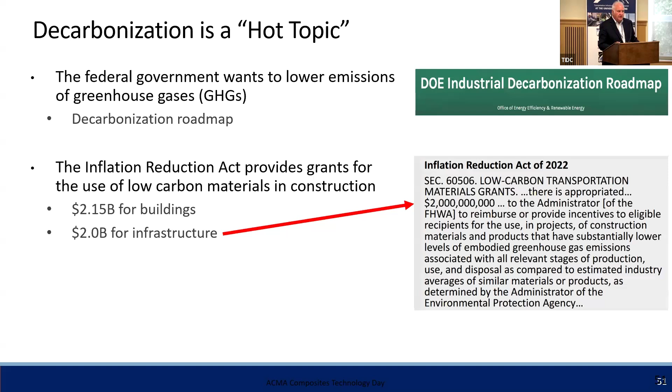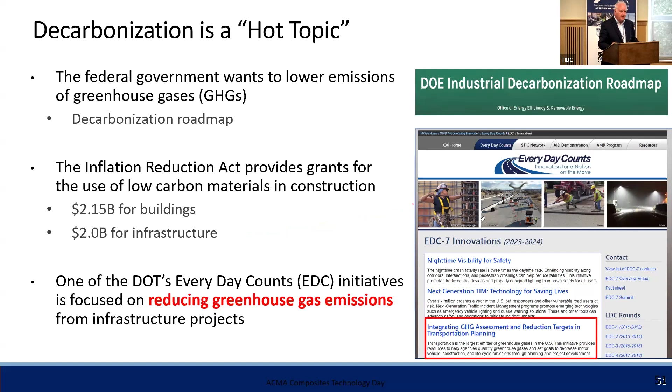And the government is definitely putting their money where their mouth is. They are committing billions of dollars to the use of low carbon transportation materials, including more than $2 billion for infrastructure applications. And then you have the Department of Transportation. One of their Every Day Counts, or EDC7 initiatives, is focused on reducing greenhouse gas emissions from infrastructure projects. And then you've got funding from the EPA. Last fall, the EPA announced a grant program focused on reducing embodied greenhouse gas emissions for construction materials and products.

I'm pleased to announce that ACMA and IACMI have collaborated on a proposal that was selected last month to receive a $6 million grant from the EPA to help composite fabricators generate more of those environmental product declarations, or EPDs, that Reed just talked about. They call the partnership CIRCLE, and CIRCLE stands for Climate Impact Reduction through Composites Life Cycle Evaluation. The purpose of the partnership is to show how emissions of CO2 and other greenhouse gas emissions can be lowered with composites. There are both cradle-to-gate and gate-to-grave elements of that program. And I can tell you that as a result of this program, you are going to see many more environmental product declarations for fabricated composite products in the next several years.

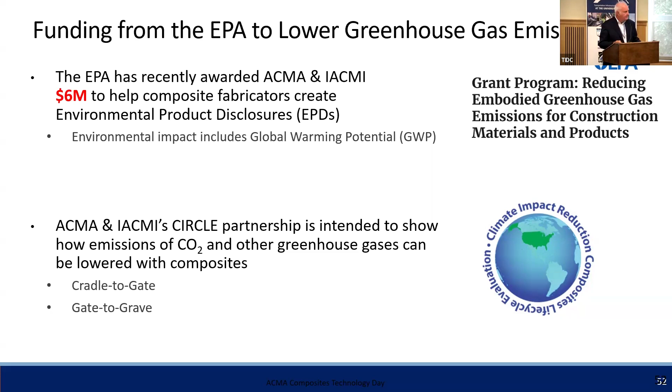So I told you the title of my talk is An Important Equation for Decarbonization. And I'm not going to keep you in suspense any longer. Here is the equation: Concrete plus FRP equals lower CO2, where FRP equals fiber reinforced polymer. Now, it's not a very mathematical equation. You've got a plus sign up there, you've got an equal sign up there, and you've got a subscript 2. But if you were looking for a differential equation, that's not what I'm showing you. I want to show you in the next 15 minutes or so how using this equation can be a solution to lowering CO2 emissions. It can help you decarbonize your infrastructure projects.

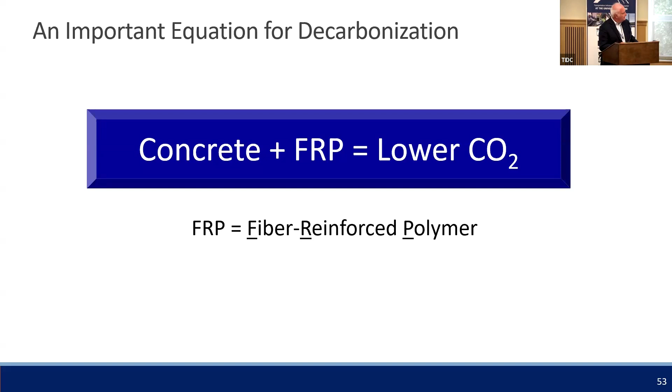So I've given you the equation. Now I want to give you the take-home message, and I'm going to repeat it several times during my talk. Here's the message: that the use of FRP composites can lower embodied carbon and CO2 emissions in infrastructure and construction applications. Simple equation, simple message.

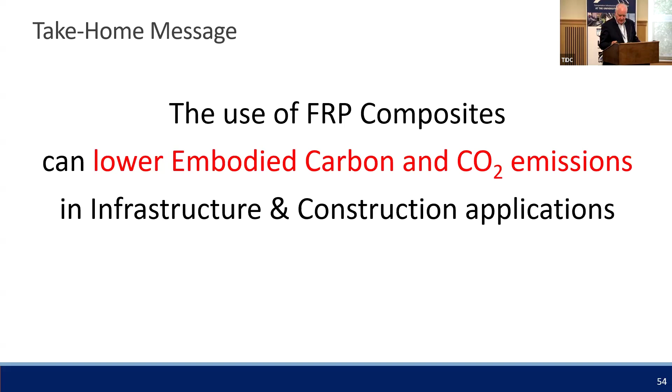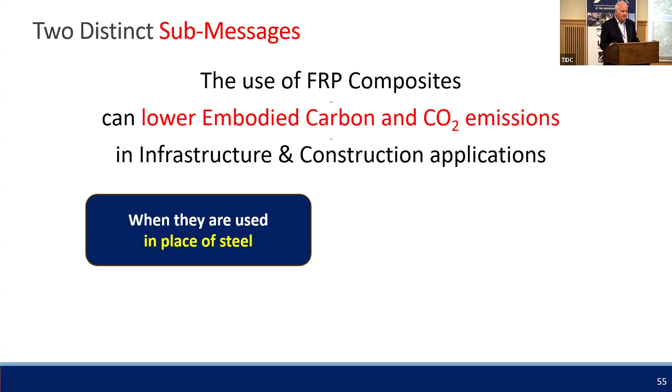And what I want to show you in the course of my talk is how this is true for both cradle-to-gate and cradle-to-grave emissions. Actually, I'm going to expand on this and say that it's really a two-part message, that there are two distinct sub-messages, if you will. The first is that the use of FRP composites can lower embodied carbon and CO2 emissions in infrastructure and construction applications when they are used in place of steel. And the second part of the message is that the use of FRP composites can lower embodied carbon and CO2 emissions in infrastructure and construction applications when they are used in conjunction with concrete.

And that's what I want to talk about today. So the first question you're probably asking is, why is it a two-part message?

Well, to answer that, I want to show you this slide and talk a little bit about sources of embodied carbon data. I'm going to tell you about multiple sources of that data. The first are these databases from the Carbon Leadership Forum. I call them the CLF databases. They were published in 2021 and 2023, and they give you emission factors for construction materials like concrete, steel, and aluminum. These databases do not contain information for FRP composites.

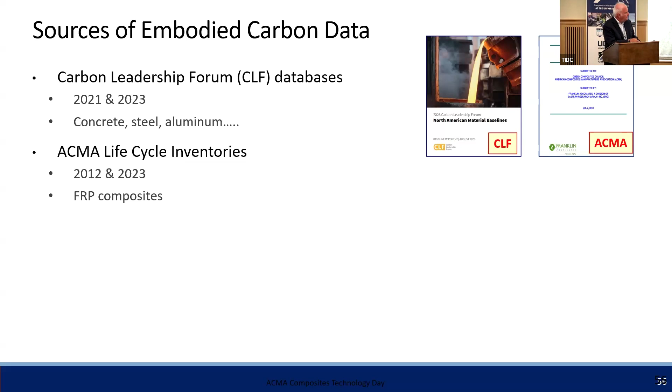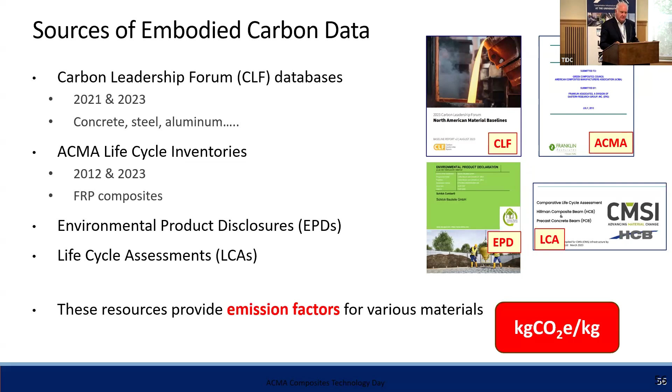When you get into these databases, the information you find is that they provide emission factors. The most common emission factor units are kilograms of CO2 equivalents per kilogram. That's the most common one, and that's the one I'll be using in a lot of these calculations. But it's not the only units, and you have to be very careful about them, because for concrete, for example, it can be kilograms of CO2 equivalents per cubic meter. So when you're doing comparisons between materials, it's important to watch the units.

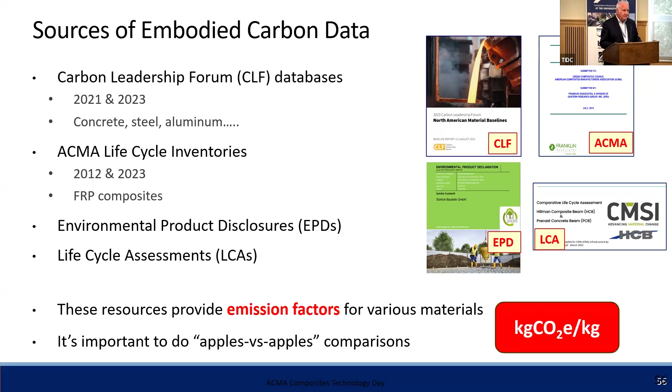And as Reed said, it's very important to do apples-to-apples comparisons, and that's what I've tried to do. So now I can begin to say, why is it a two-part message? To do that, I'm going to show you some example calculations.

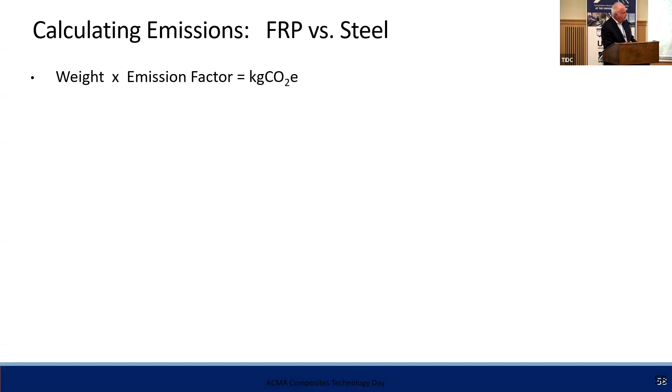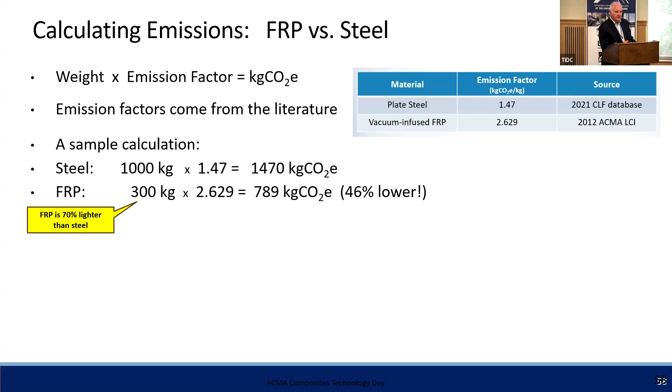The first one I'm going to do is FRP versus steel. To calculate kilograms of CO2 equivalents, you need a weight and an emission factor. The emission factors come from those databases in the literature I've just shown you. I'm showing here the ones I'm using for plate steel and FRP in this example. Now, to keep the math simple, I'm going to take a steel part and make it 1,000 kilograms. So to get kilograms of CO2 equivalents, I multiply it by this emission factor, and I get 1,470 kilograms of CO2 equivalents.

Now let's do the same thing for FRP. This is where the weight difference between steel and FRP becomes extremely important, because instead of a 1,000 kilogram part, FRP is 70% lighter than steel, so you only have a 300 kilogram part. Now you multiply it by this emission factor for vacuum infused FRP, and you get 789 kilograms of CO2 equivalents. That is 46% less than the example with steel. So the emission factor for FRP is higher, but the weight of FRP is much lower, and when you calculate that product, you get lower kilograms of CO2 equivalents with FRP. So this is sub-message number one: you can use FRP in place of steel to significantly lower emissions.

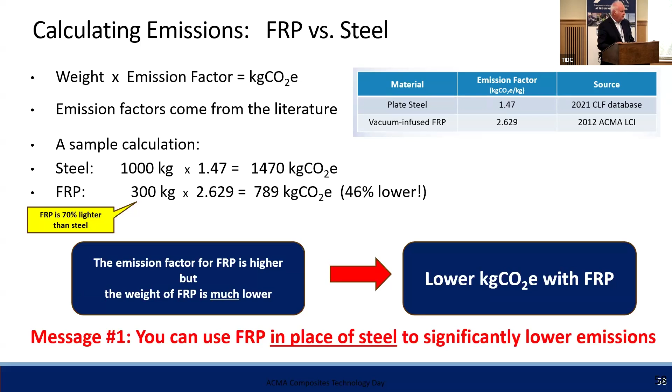Now let's talk about sub-message number two. Here I'm comparing FRP versus concrete. Again, I go to the literature and get emission factors for the various materials. Now I'm sure that almost everyone in the room has heard somewhere that cement production is one of the largest producers of CO2. I've seen numbers as high as 4 to 8% of global CO2 production associated with the production of cement. So it's true, but a lot of that has to do with the sheer volumes of cement produced every year.

And remember, you don't build structures with cement, you build structures with concrete. Concrete is only about 10% cement. So the emission factor for cement is 1, but the emission factor for concrete is 0.1, and that order of magnitude makes a huge difference when you're doing calculations. Let's do one: again, I'm going to take a 1,000 kilogram part with concrete, but I only multiply it by 0.1, and I get 100 kilograms of CO2 equivalents.

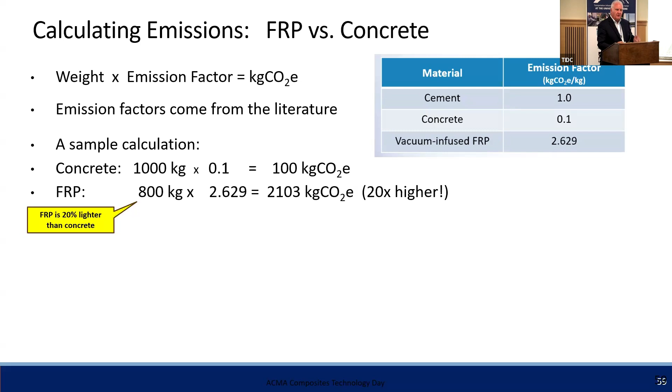Now let's do it for FRP. FRP is lighter than concrete, about 20% lighter, so I've only got 800 kilograms there. But then I have to multiply it by 2.629 and I get 2,100 kilograms of CO2 equivalents. That's 20 times higher than concrete.

So replacing concrete with FRP does not reduce emissions. You need a different message, a very different message than with steel. And message number 2 is that you can use FRP in conjunction with concrete to lower emissions.

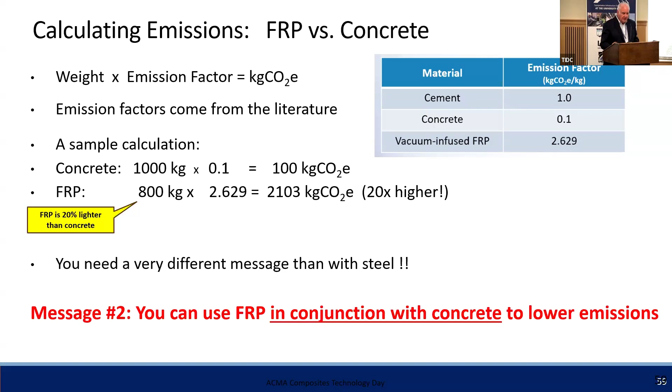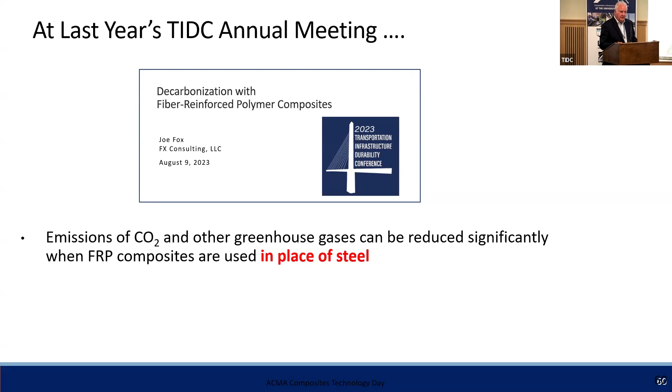So at last year's meeting, a year ago, I gave this presentation, Decarbonization with Fiber Reinforced Polymer Composites. And I really told you message number 1. I showed you that emissions of CO2 could be reduced significantly when FRP composites are used in place of steel. So I'll call last summer's presentation Chapter 1, all right?

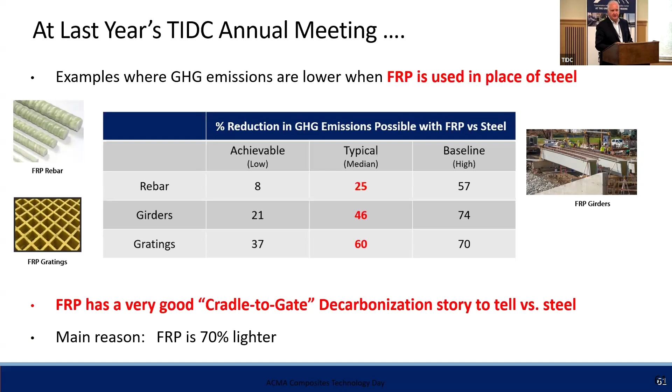So if you summarize all this, and this was the take-home message last year, FRP has a very good cradle-to-gate decarbonization story to tell versus steel. And the main reason is that FRP is 70% lighter than steel.

Now let's move to Chapter 2, a different message. Emissions of CO2 and other greenhouse gases can be reduced when FRP composites are used in conjunction with concrete. And here I come to this very simple equation: concrete plus FRP equals lower CO2.

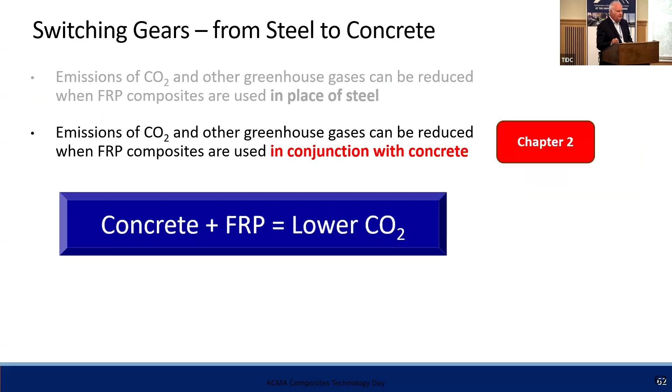And what I want to show you are 4 examples where you can lower CO2 emissions by using concrete with FRP composites. I'm going to talk about the Hillman composite beam, carbon pre-stressed concrete, the Halls River Bridge, and carbon cast. And in all 4 examples, again, I'm going to show you double-digit reductions in CO2 emissions when you use FRP in conjunction with concrete.

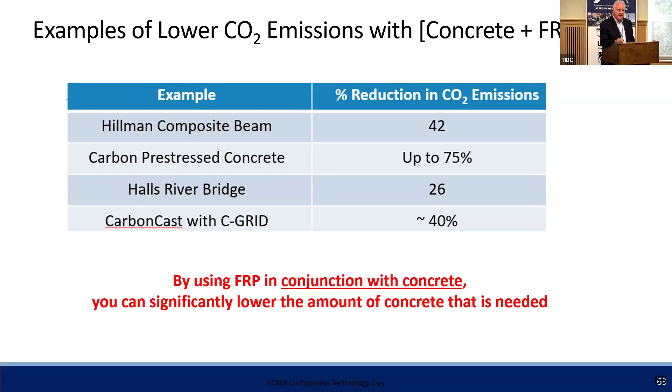And the reason is that by using FRP with concrete, you can significantly reduce the amount of concrete that you need. And when you need less concrete, you need less cement, and you generate less CO2. So let's go through those.

But before I go through those 4 examples, I just want to show you this very useful figure from the 2023 CLF database. I really like this figure because it shows all the life cycle stages of a building material. You've got the product stage, the construction stage, the use stage, the end of life. Down here, you've got these arrows which very clearly define things like cradle to gate and cradle to grave. It also contains alphanumeric terms like A1 and B3, which define the various steps in each stage. I'm going to be using some of these alphanumeric terms as I go through the 4 examples.

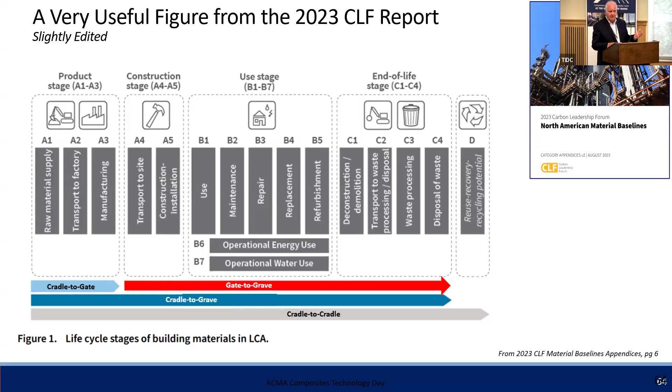So first, let's talk about the Hillman composite beam, or HCB. How many of you have ever heard of the Hillman composite beam? Okay, quite a few people, all right? Well, there's a picture of a beam. There's a schematic showing the various elements of a beam. And the best way to describe an HCB is that it is a hybrid construction that contains embedded steel rebar in a concrete core and a thin outer FRP shell. So what you've got here is a beam that contains concrete, steel, and FRP.

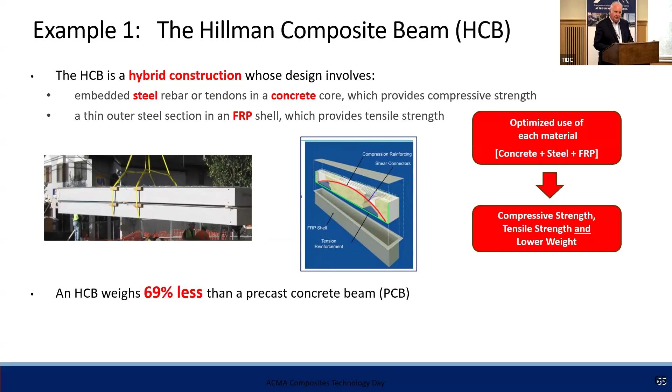And it's the optimized use of each of these materials that gives you both tensile strength and compressive strength. It also results in a much lower weight beam, because an HCB weighs 69% less than a precast concrete beam of similar size.

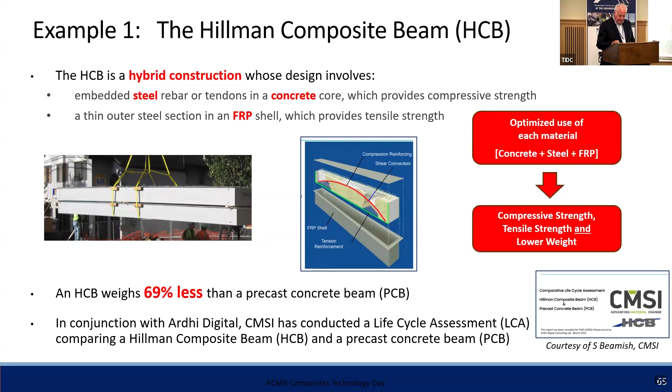In conjunction with Ardhi Digital in the UK, CMSI, a Canadian fabricator, has conducted a life cycle assessment comparing a Hillman composite beam and a precast concrete beam, PCB. Here are the results of that LCA. This bar chart shows a 42% reduction in global warming potential, in the amount of greenhouse gases, when you use the Hillman composite beam relative to the precast concrete beam. You've got 15,000 kilograms of CO2 equivalents for the HCB, and over 26,000 for the PCB.

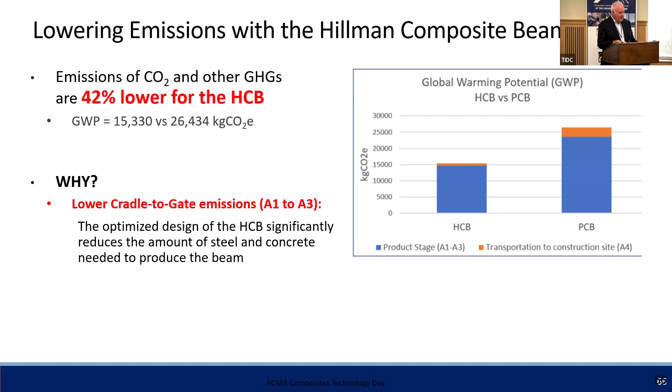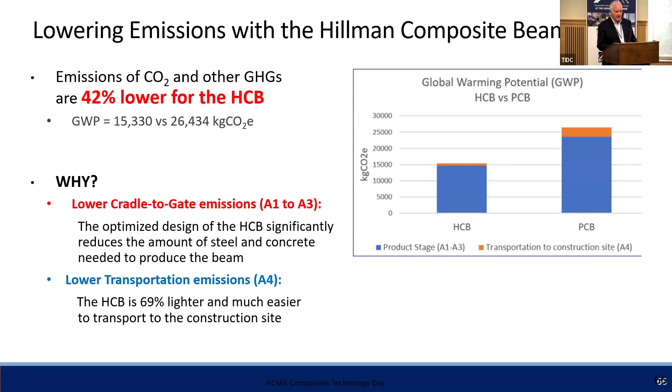42% lower. Why is that? Two reasons. First, the cradle to gate emissions, those A1 to A3 emissions, are lower because the optimized design of the beam significantly reduces the amount of steel and concrete you need to produce the beam. Second, you've got lower transportation emissions, or A4 emissions, because the HCB is 69% lighter, which means it's much easier to transport to the construction site. 42% lower.

The second example I want to talk about is carbon pre-stressed concrete, or CPC. This is a technology developed by a Swiss company called CPC AG, who worked with Holcim, a big concrete supplier, to bring it to the marketplace. They've won a lot of awards in Europe for this. CPC uses high-strength concrete reinforced with pre-stressed carbon fibers, and it's used in applications like this pedestrian bridge and this observation tower.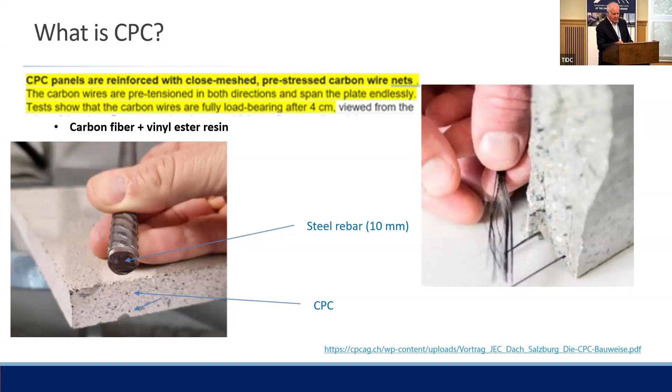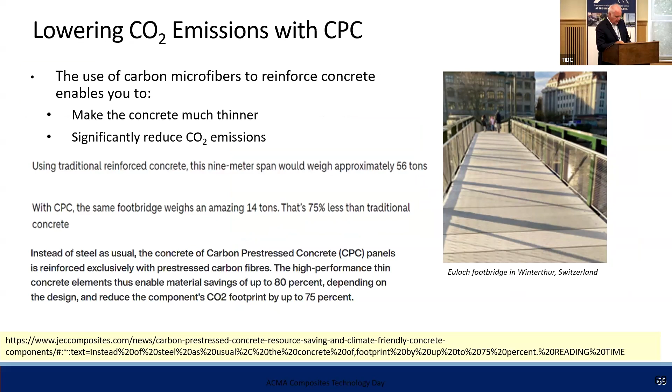So how do you lower emissions with CPC? The use of those carbon microfibers to reinforce concrete enables you to make the concrete much thinner, and that significantly reduces CO2 emissions. Less concrete, less cement, less CO2. They use the example of a footbridge in Switzerland to make that point. If you make this footbridge with traditional reinforced concrete, it would weigh 56 tons. When you make it with CPC, that same footbridge weighs 14 tons, a 75% reduction in weight. You're reducing the component CO2 footprint by up to 75%.

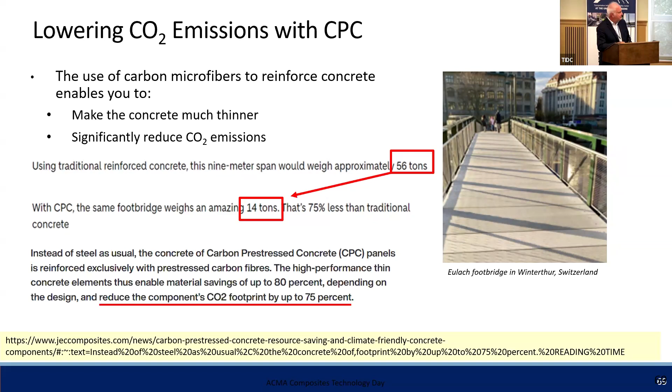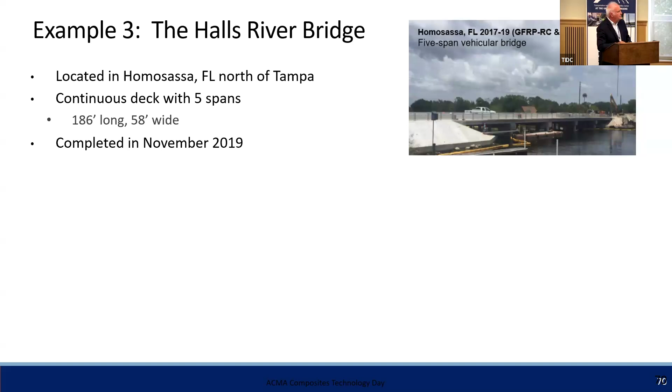75%, double digits. The third example I want to talk about is the Halls River Bridge. This is located in Homosassa, Florida, north of Tampa. It's a continuous deck with 5 spans, completed in November of 2019. You see a picture of the bridge there. This was really an experimental project by the Florida DOT, who used all kinds of innovative materials in this bridge.

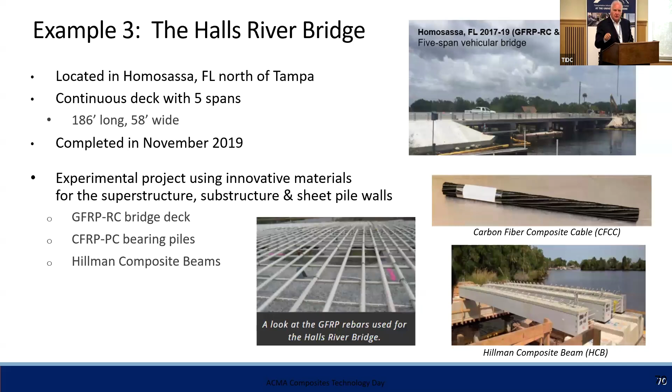Many of them were FRP. They used GFRP rebar, carbon fiber composite cables, which are the macroscopic cables I talked about a few minutes ago, much larger than those carbon wire nets, and Hillman composite beams. The main reason they used FRP for this bridge was the corrosion resistance of FRP, since this bridge exists in a very corrosive environment in Florida.

This is an article in Advances in Civil Engineering Materials. The authors are Thomas Cadenazzi, Tony Nanni, who was a professor at the University of Miami and Thomas's PhD thesis advisor, and Steve Nolan from the Florida Department of Transportation.

They have conducted the most comprehensive life cycle assessment (LCA) and life cycle cost analysis (LCCA) that I have seen for FRP in an infrastructure application. We could spend an hour going through this publication, so here's the Cliff Notes version.

Their LCCA showed that the net present value of the life cycle cost is 20% lower with FRP, primarily because of reduced maintenance and replacement costs. That's another very good story for FRP, but that's a story for a different day.

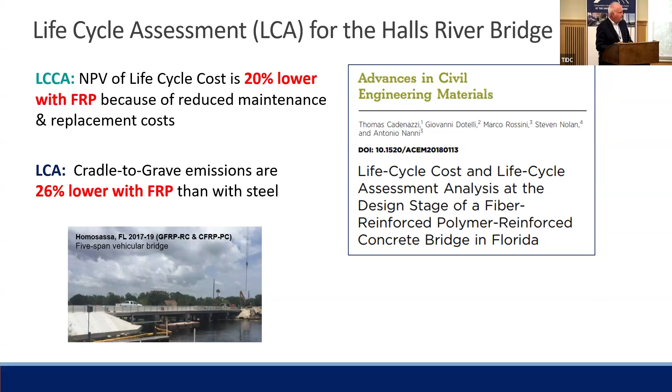Their LCA is relevant today because it showed that cradle to grave emissions are 26% lower with FRP than with steel. Again, double digit. And here's the data that shows that.

These are tables taken from their report looking at the kilograms of CO2 equivalents, cradle to grave. This is the data for the FRP bridge, and here is the data for the steel bridge. If you compare this number to this number, you see that the kilograms of CO2 equivalents are 26% lower with the bridge made with FRP. And if you go across the rows, the emissions are lower at every stage.

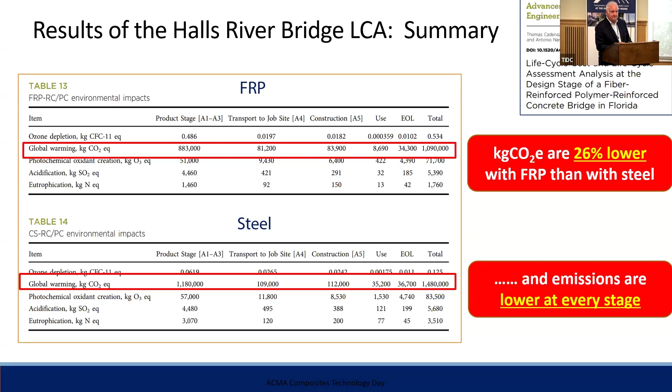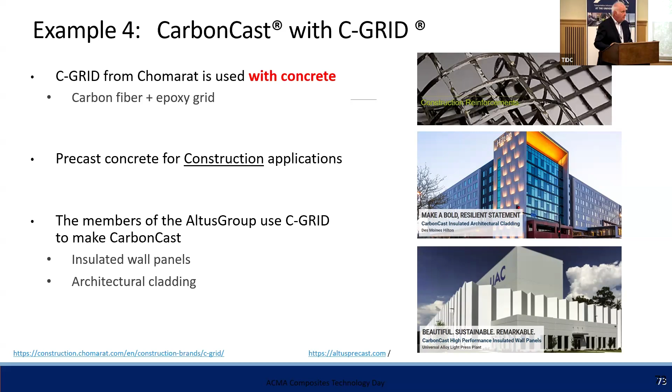Carbon cast uses a material known as C-grid with concrete, and this is a picture of C-grid. It is a flexible grid that consists of carbon fiber in an epoxy matrix, and it is supplied by a company known as Chomarat.

How does C-grid work? What does it do? It serves two functions. It is a low thermal conductivity, high strength connector between two concrete wythes. Basically it is a truss, this green truss here, that extends through the insulating foam between the two concrete wythes. It has much lower thermal conductivity than a steel connector, so it helps the insulating properties of the building.

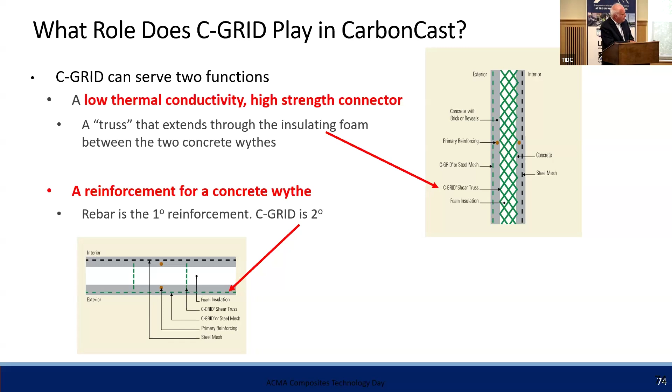And then it can also serve as a reinforcement for a concrete wythe. In this schematic down here, it's actually serving as a secondary reinforcement, these green dash bars, and FRP rebar is the primary reinforcement. So two different functions.

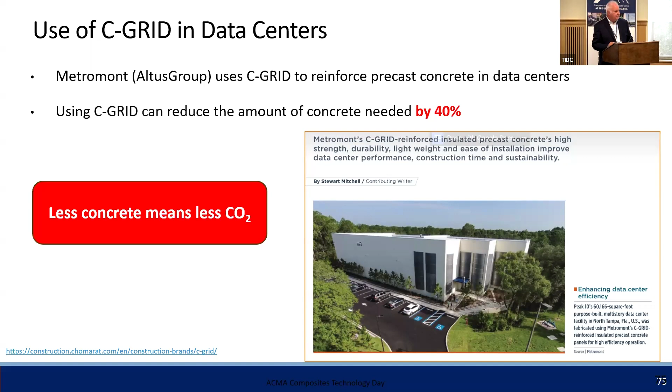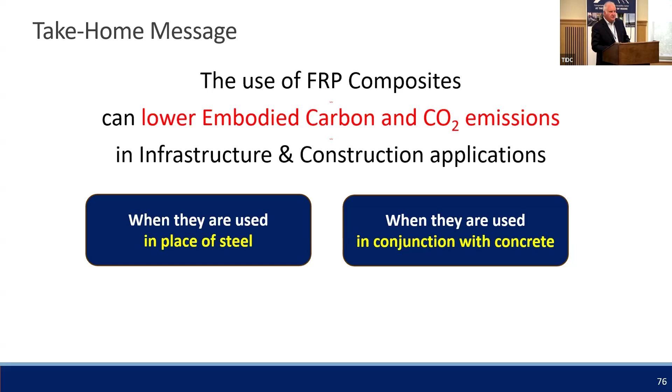So now I've shown you four examples of double-digit reductions when concrete and FRP are used together. So I'll come back to my take-home message one more time: the use of FRP composites can lower embodied carbon and CO2 emissions in infrastructure and construction applications when they are used in place of steel and when they are used in conjunction with concrete.

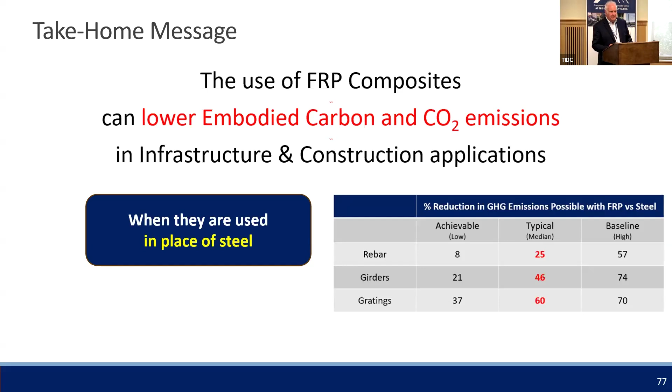In place of steel, I've shown you this table with double-digit reductions for things like FRP rebar, FRP girders, and FRP gratings, and a lot of that has to do with the weight reduction. And then I've shown you today in chapter 2, four examples where once again you see double-digit reductions in the amount of CO2 emissions, because you're reducing the amount of concrete.

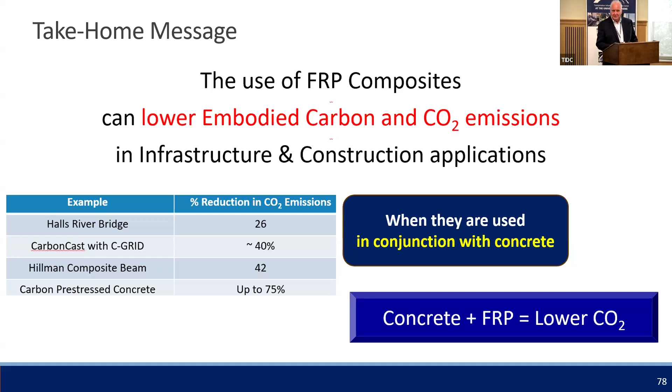So that takes me back to the simple equation: concrete plus FRP equals lower CO2. And that's what I'd like you to take away from today. It all amounts to, if you use FRP in the right way, you can lower the amount of concrete, you can reduce the amount of cement, and you can reduce the amount of CO2. So if you want to decarbonize your infrastructure projects, I'd like you to remember this equation. And that concludes my presentation.